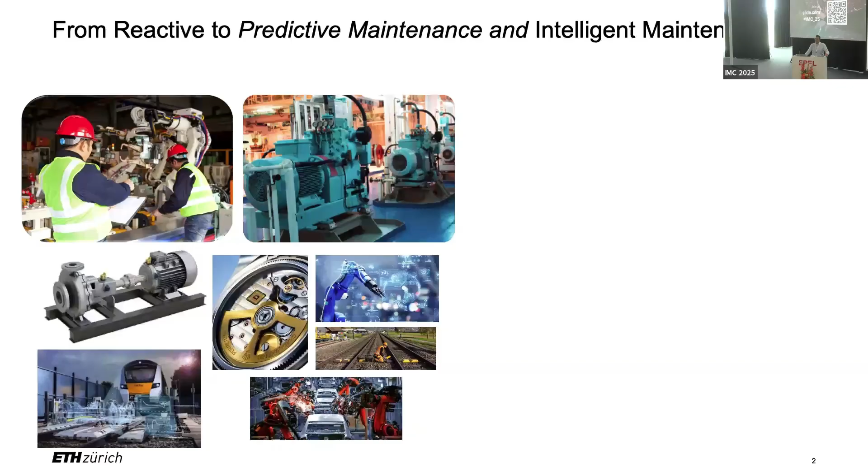So maintenance was always needed on machines, watches, trains, cars. You see from the program we are having today that there are many use cases of maintenance. And we are moving for many reasons, from industrial aspects, marketing aspects, research aspects, with people coming from academia, in a very hot topic.

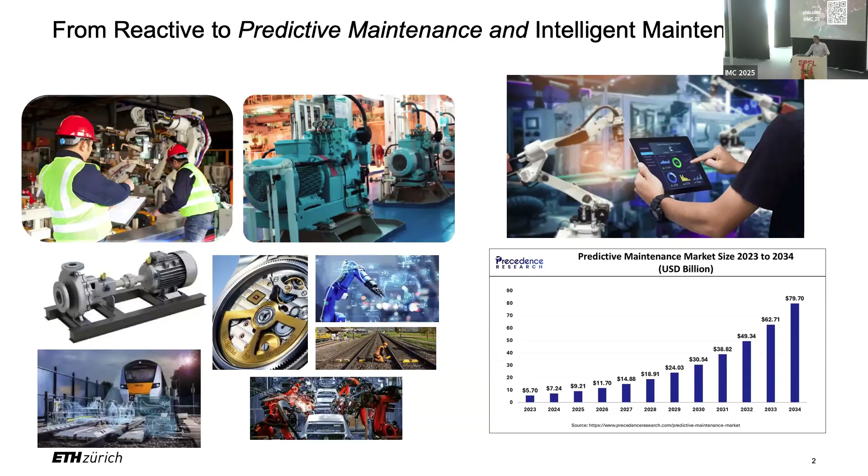We have some robots, devices, electrical motors, whatever needs to be monitored with sensors. The sensors are producing data. These data are collected somehow from the physical devices to the cloud, or in general to some storage. And then the cloud mainly extracts important information from this data. And then we can have a decision. We can go back to the user, or the people that are taking decisions, or we can have automatic decisions. And somehow we are giving a service to the monitored devices.

This is still the case. You will see in my presentation some things completely different, from wearables to robotics, but still we have this loop: devices, sensors, some intelligent software in the cloud or somewhere else, and actions that we want to do to our machinery.

And now, also from the title of my presentation, there is a lot of interest and trends saying that this software I mentioned before is more and more based on artificial intelligence algorithms, which are nothing more than software or signal processing of this data, that are today performed in the cloud. They are moved more and more to the edge. And we are going to show what this means, because I would like to show you what I think is interesting, especially in the case of predictive maintenance and intelligent maintenance.

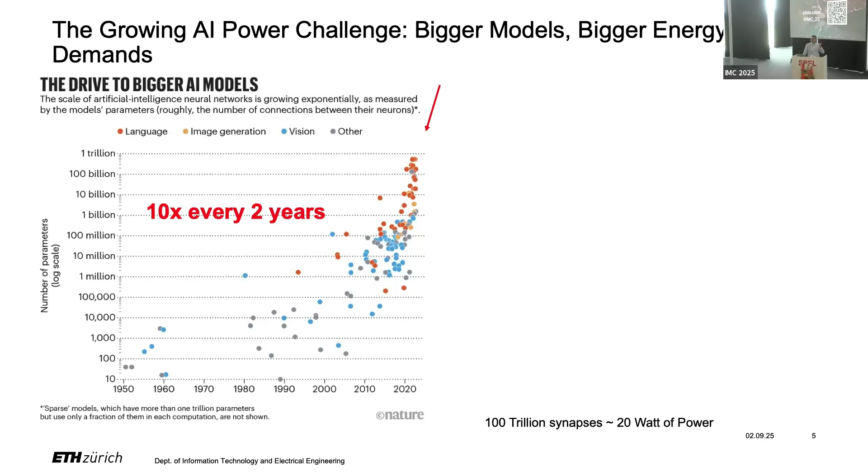So why aren't we bringing this model and pushing it back onto this little core and edge? The main reason is that today these models are quite big and large. So these models are so large that they cannot fit on an embedded processor.

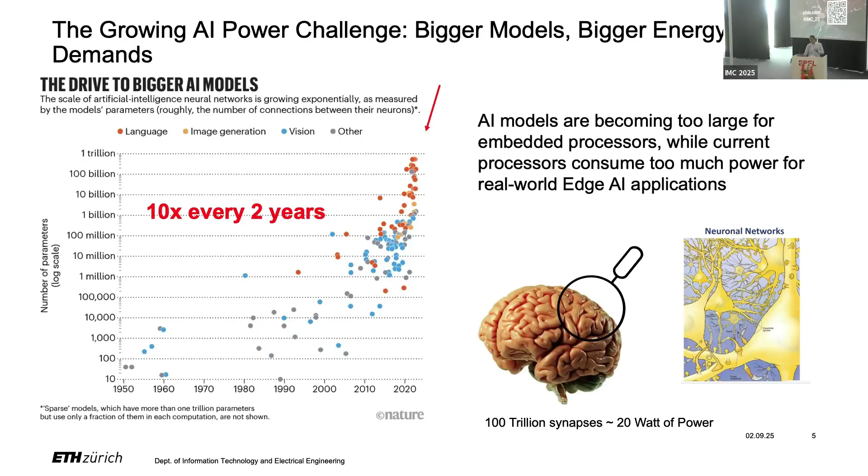We are going to see what this means with the next plot. Even if you are called NVIDIA and you are able to do impressive things in terms of processing power, you are paying for it based on the fact that all the processors are based on silicon transistors.

So you are not special, you are NVIDIA and you are not using different kind of technology. The transistor is the base of all the processors we have, from our PC, our embedded system, our sensor with intelligence cores, and NVIDIA cores, NVIDIA platform.

So why is NVIDIA so good? Because there are many people, but also because they are targeting data center systems. They are targeting processors that can work in the range of hundreds of watts. This is because cloud is very expensive. They are there doing AI.

And that means, of course, there is no magic. If you have a lot of power, you have a lot of memory, you have a lot of computational resources that in parallel can run your data.

So is this enough to run all your models in mind for predictive maintenance? Probably yes. But what is the problem? The problem is that if you want to push at the edge, likely you will have a processor that needs to consume less than a watt, let's say.

You can have also a few watts, but we are in the range of watts versus hundreds of watts that we can spend in the cloud. And as they are using the same technology, the same transistor, it means that you are paying it in terms of memory and computational resources.

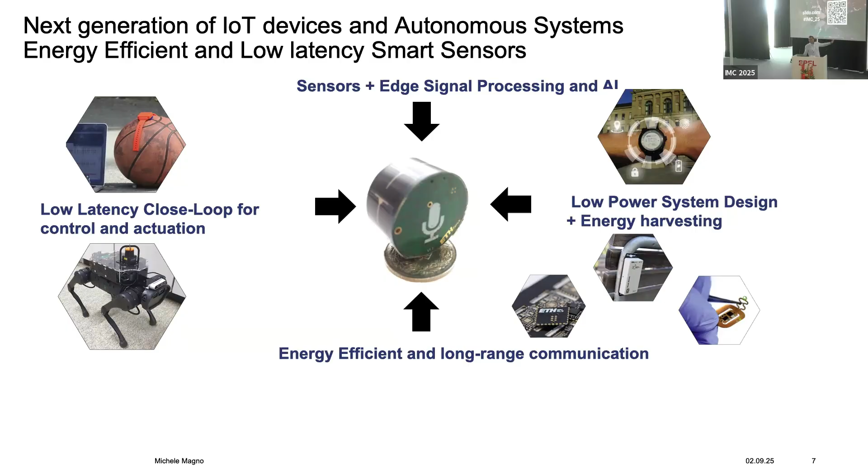Just to give an overview, these are the main 4 topics of my group that we work on, both in teaching and in research, supervising many students and PhD students as well.

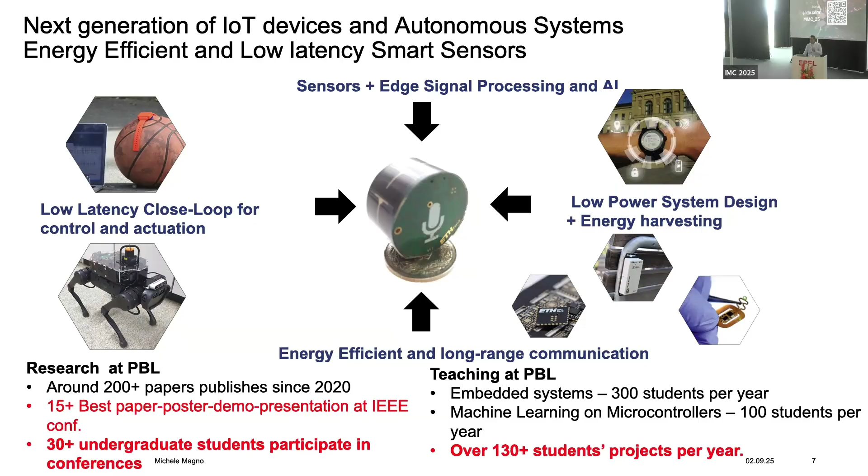But I want to go more concrete, because this is a generic overview for my group, but in reality, what does this mean? It means that since we cannot create new hardware platforms, processors, GPUs, or microcontrollers that consume only a few milliwatts or watts of power, you can instead play on novel sensors. Not always possible, but today there is a lot of interest in designing new sensors. I'll give an example of sensors producing relevant information for a particular application.

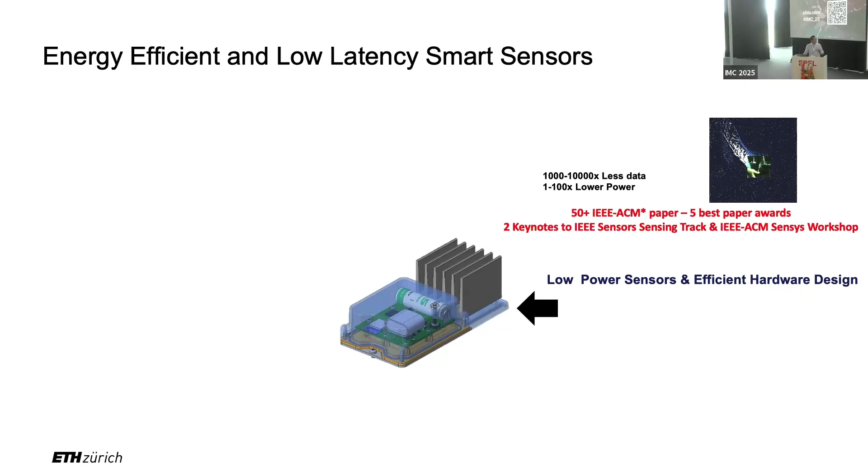So you can reduce it, you can go up 1,000, 10,000 times, less data, and lower latency in processing this data with efficient artificial intelligence to do the same job. For example, in this case it was a navigation system for a robotic platform using an event-based camera. You can do the same job faster, at parity of technology in terms of CPU power, faster and with lower power. We're doing the same job with a different sensor, different artificial intelligence.

So we can push existing hardware and existing solutions, in terms of hardware and software, bringing innovation through combination to a level that is way more than Moore's law can give you, that is, double memory, double computational resources every 2 years. You can go today to things in the range of 1,000 times lower energy, 1,000 times lower latency.

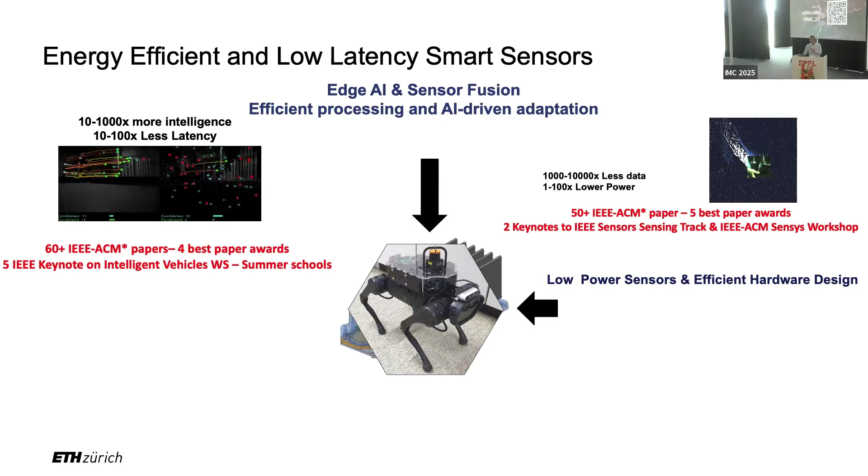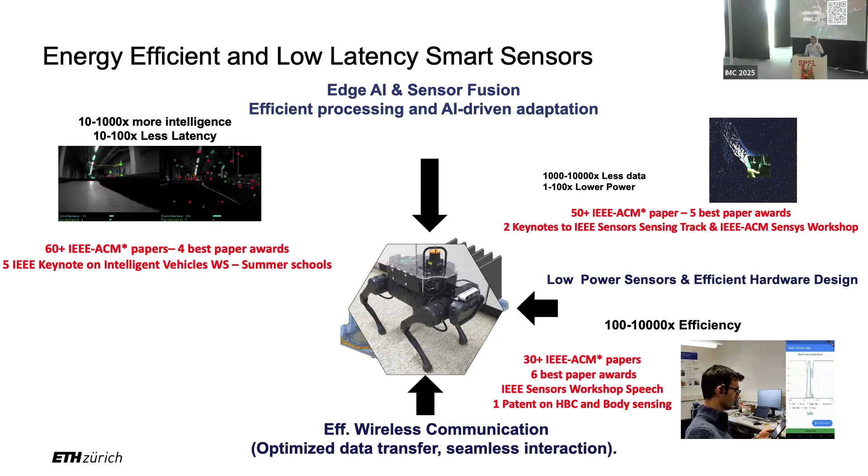And I think here there is a converter problem. As I mentioned in this talk, I'm not going to speak too much about efficiency, but in this case I want to show, for example, this was using radar for gesture recognition instead of camera or other sensors. We could go down in this range of intelligence and latency. We have gesture recognition with a little radar on earbuds, and we transmit only 1 byte, so efficiency only in communication, to the smartphone.

This is the gesture that the user, in this case our PhD student, was performing there. And you will see that this architecture fits very well the application-specific case. Of course, this is only valid if you have your application clear in mind. Is this camera, or any other sensor you'll see in this presentation, better than an RGB camera? It's not true for everything. But if you want to identify an object, a defect, or any other target where movement is very important, yes, this can be a crucial bet.

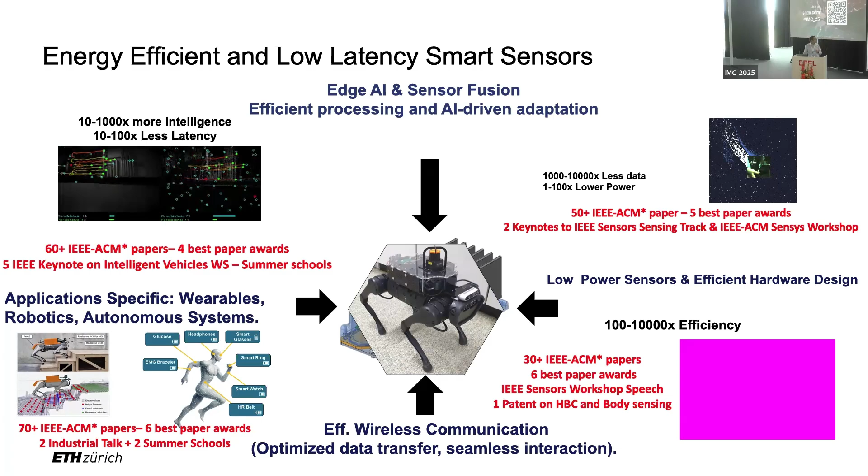And you will see that often it's actually the combination of different sensors that brings the benefit. This is why, in our group, we focus on energy-efficient smart sensors in general. It's good to have the application in mind to be covered, and efficiency at every level, from the sensor, to the low power design, to the AI part, and to the application, eventually also the communication if this is needed. I want to go through some examples of this topic, showing why this can be crucial for many applications.

You can see that, if you look at only this node, this is actually a node that we did in cooperation with a company in Italy, where we were supposed to monitor temperature, humidity, and acceleration of the electrical machine. This is actually quite common; you've probably already seen it, that many people proposed that you can put a little node on your electrical machine, and then it tells you, especially if it's sending information to the cloud via Bluetooth or similar, what is happening in your machine.

And with this we went a bit beyond this vision, to get something that is self-sustained. In this case, we would like to place the sensor on the motor and not touch it anymore. So we want to place it with the right sensor and only alert when something is happening. And to do that, you need to take energy from somewhere. If you don't want a battery, if you want the vision of it working forever, you need to put in a source of energy.

In this case, we found the application very important, what was reliable there. So we have a difference of gradient: the motor that we can rely on is around 55 degrees, and the airflow is 25 degrees. So we could exploit thermal energy harvesting. Why is this important? First, low power design. Second, we can take energy from what is available. So if you tell me we work with vibration here, well, we don't have enough vibration.

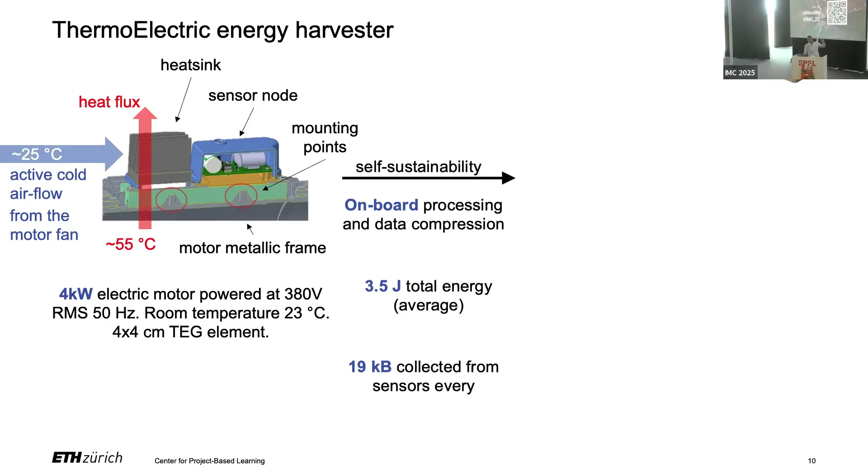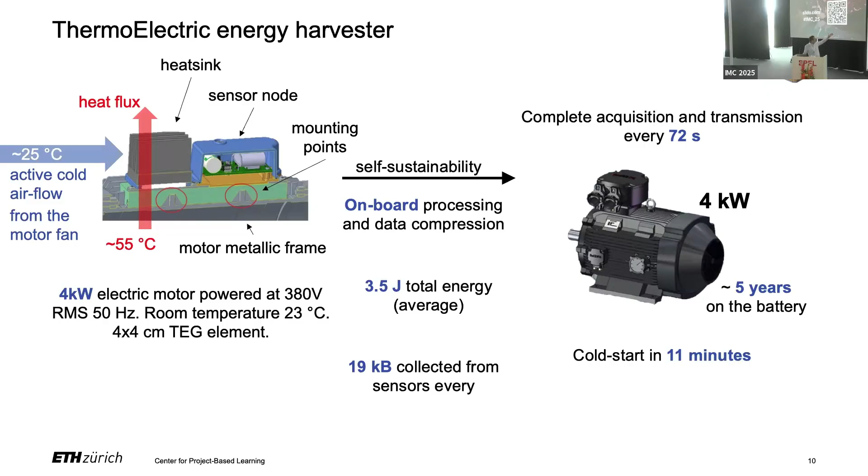And if we combine all together, including the tiny machine learning that is able to perform the prediction of the condition of the machine, we can have in normal condition, with the battery, 5 years of life. In reality, we can have a self-sustaining system that can be placed, like you can see in this case. I think now this probably became a product from the company we are working with, and basically you can monitor your machine in different ways. Of course, this is a completely flexible, custom system, so you can tune it for your specific goal.

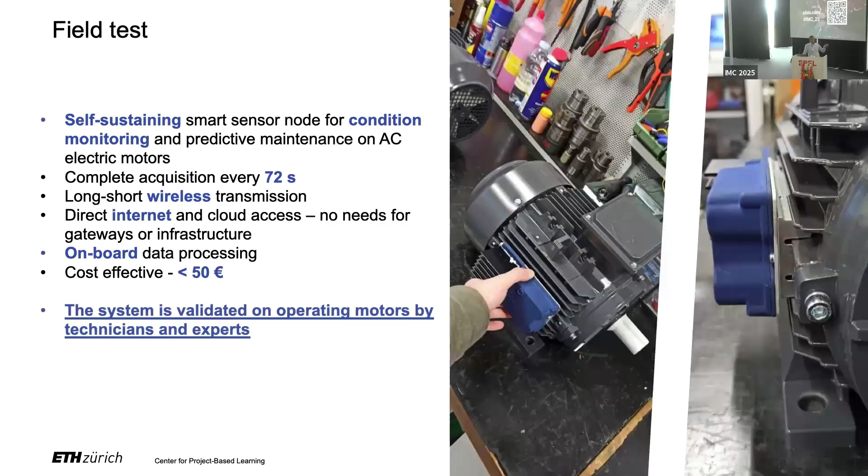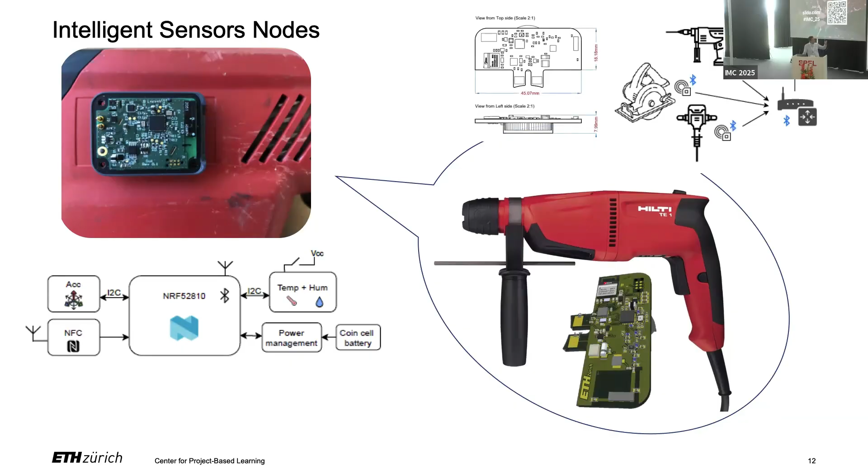And this is also what we did. With the same approach, we were working with different intelligent sensor nodes. They are using something similar: Bluetooth Low Energy, an ARM Cortex M4 core, so a little microcontroller consuming in the range of milliwatts of power. And we could retune it, changing of course the shape, changing the sensors accordingly. So here we see many sensors we are using.

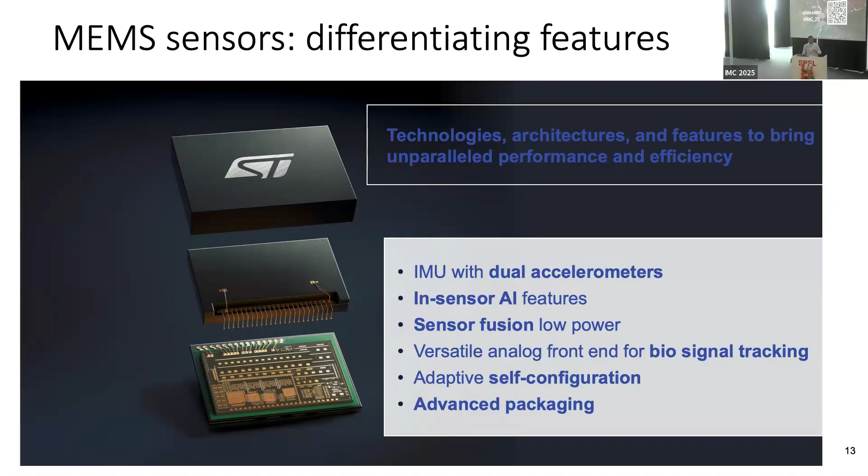Why could this be very interesting? Because it's very interesting for cost reasons, for space reasons, for supply reasons, because it's consuming microwatts of power, and to have an always-on system that can monitor your machines. I think this approach is important because we were using only some kilobytes of memory to perform our AI part. And it's a system that has more or less 16 kilobytes free to do it, so our model can already run on it. Of course, there are trade-offs. And it's not only STMicroelectronics; Analog Devices and Bosch are proposing something similar.

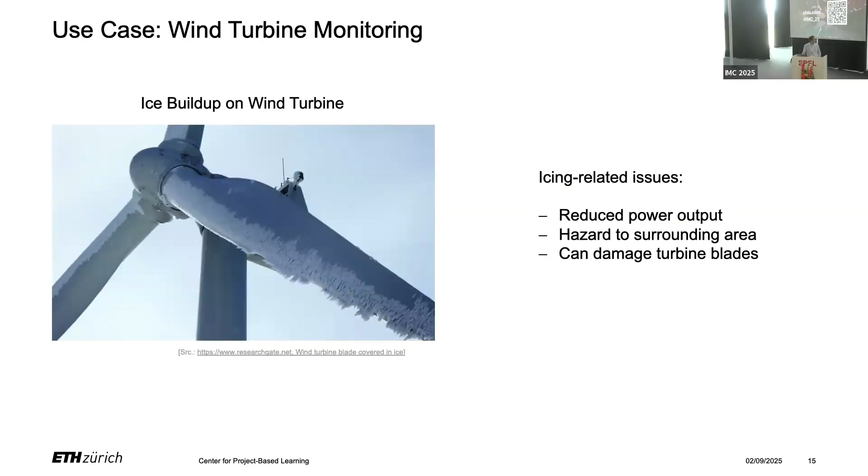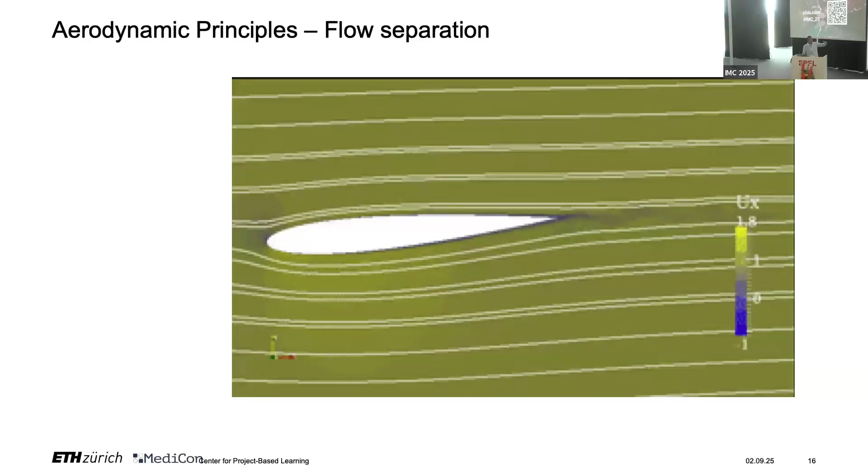And just to continue with the use cases, and then I go to the conclusion, this is an approach that you can use in different ways. These are all projects using our system. In this case, we were doing a project for wind turbine monitoring, where ice is important. Also, the aerodynamics is very important. And we started from scratch. Even the experts didn't know very well what to monitor. So they were using very expensive sensor nodes in the wind tunnel on all the blades to see what can happen. And this also comes from design optimization.

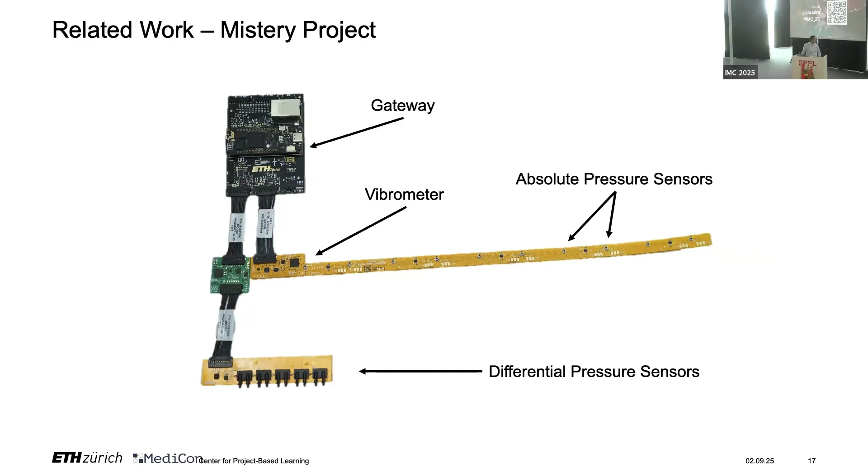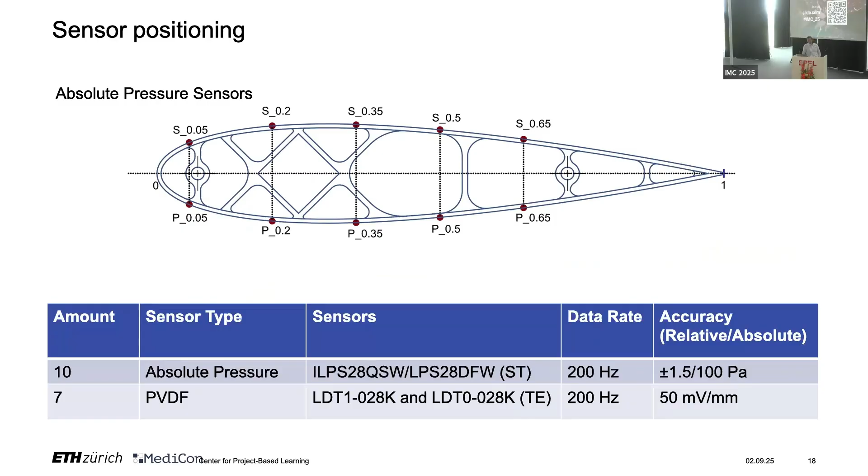So basically we designed the differential pressure sensor monitoring system, pressure sensor, vibration, and we also tried other sensors not displayed here. And we checked what is the best solution and the best position of the system to make this combination of sensor acquisition and AI give the best detection for both ice monitoring and the flow. And this is a startup that came out of this research project that is now trying to get more in-field demonstration, but all the hardware, software, firmware and the main machine learning part was done by us.

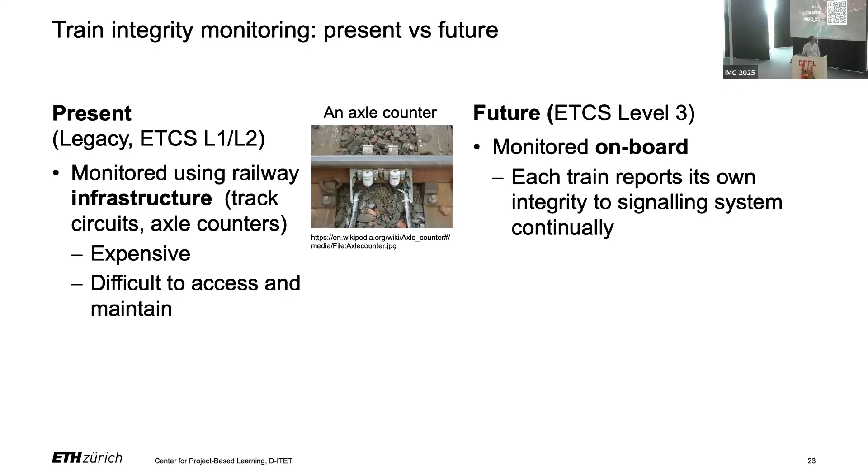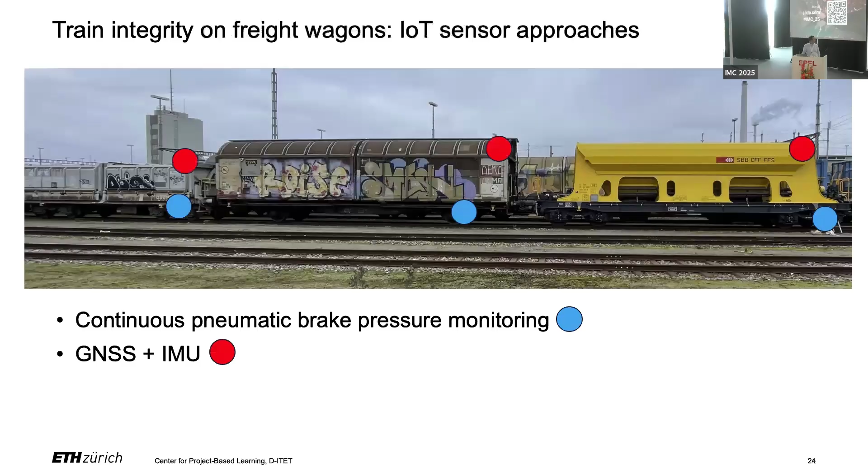I'm going a bit fast here because I want to go to the robotics part. We also did some cooperation with SBB, where we wanted to investigate how we can have IoT nodes, ultra low power and self-sustaining or battery operated, to monitor the integrity of the train, especially for the cargo that today is not supplied with sensors. And with the same approach, we ended up with ultra wideband technology, which you will see better in the video.

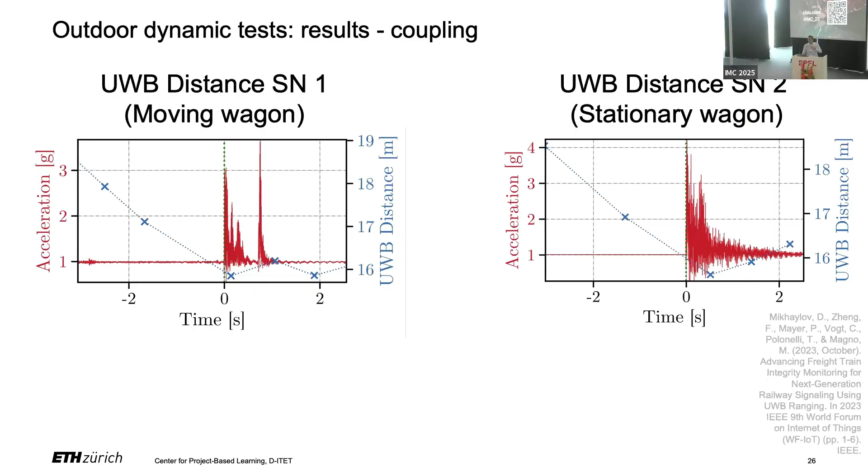So you can have two different nodes, and these nodes are coordinating with each other. You can see the blue line there: when the train is coming closer, closer, closer, you can monitor in real time what is happening and the distance to the next cargo. And then basically you can use this information to see if your integrity is still there.

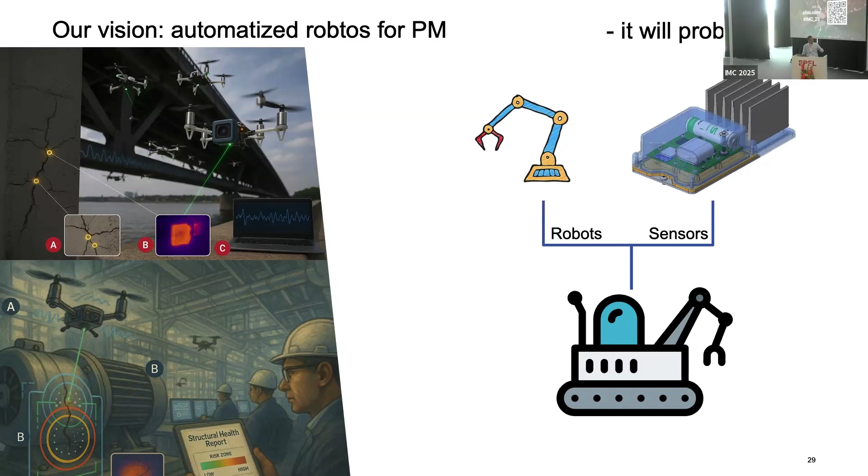And I want to, again, close the loop with the robots, because today this is a big reality. I don't know if you heard the introduction talks or the many talks NVIDIA people give. They are not pushing anymore on doing a new platform. Of course, they're doing new platforms, but their goal is not having people doing AI models. Their goal is doing physical AI, so bringing AI into the physical world. So it's an embedded system. And why? Because they have even more consumers. It's not only people on the PC sending their text, but they can bring intelligence where it's needed, in the field.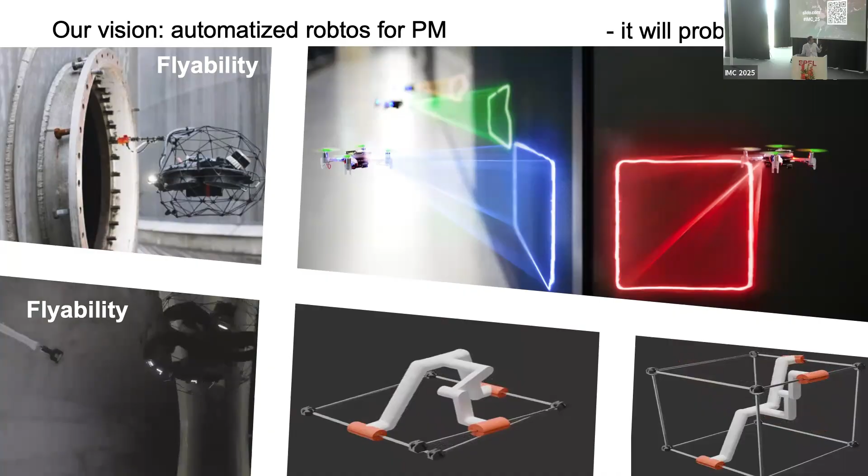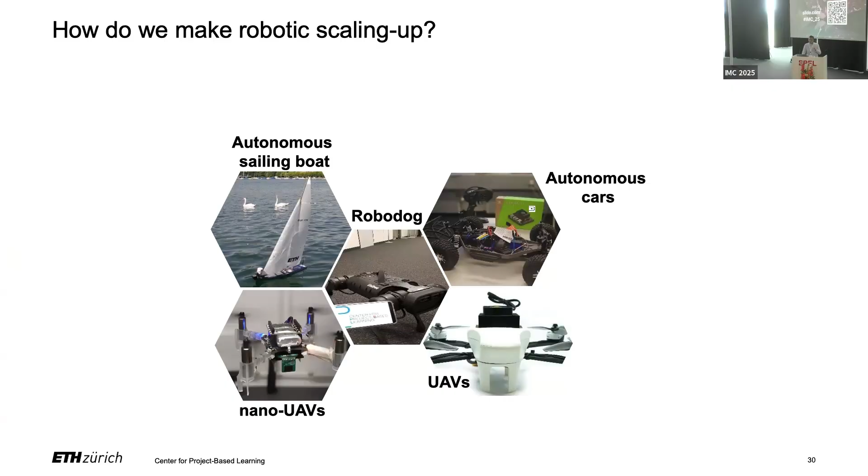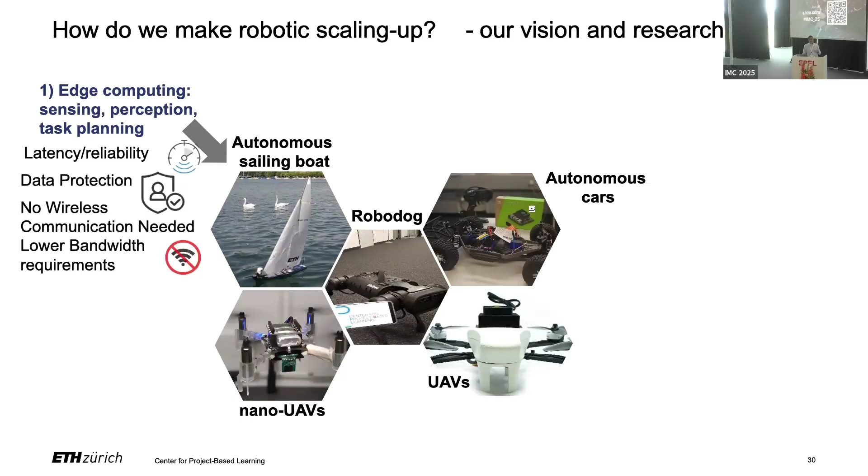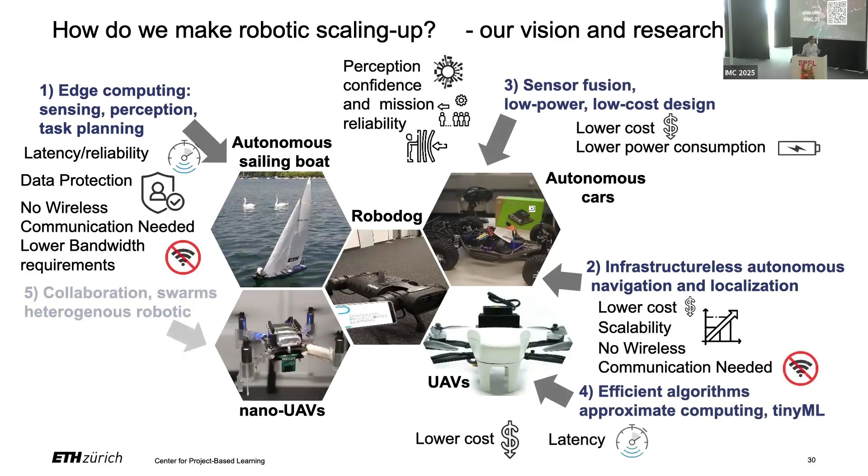And in particular, for intelligent maintenance or predictive maintenance, the approach is very similar. I'm coming from wireless sensor networks, we are moving now to robotics, but we are the same people, because the important fields there are the same. Edge computing: we want to bring AI to a small embedded platform. Also, the embedded platform of NVIDIA is consuming 10 watts, not millions of watts. You need to combine it with a system that can work without a wireless connection. You have sensor fusion algorithms, efficient algorithms that need to run on this platform, and it can also lead to cooperation.

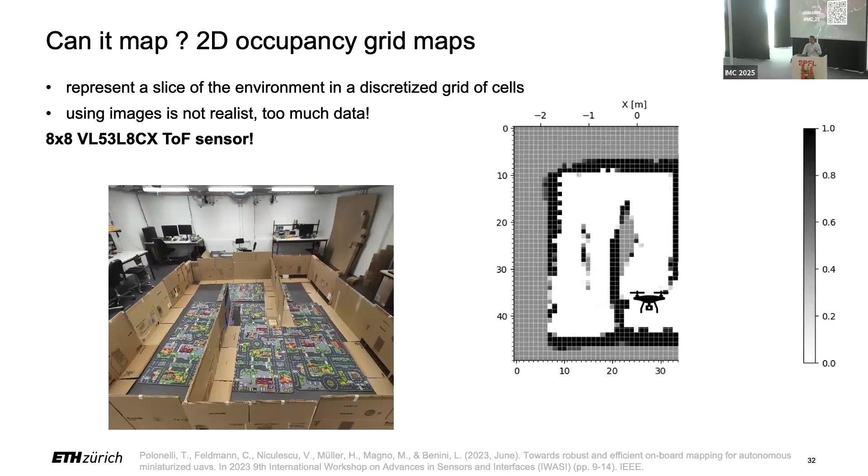And I want to close with two little examples. We did a lot of investigation on different sensors, radar, and we use this little robotic platform to show that you can replace the LiDAR, which today is used for autonomous driving and many autonomous systems. A LiDAR is expensive, 3,000 euro, and you need a big platform to process the information. You can work with these 3 sensors that cost $1, $1, $1 to have a SLAM system. I will show it with a video.

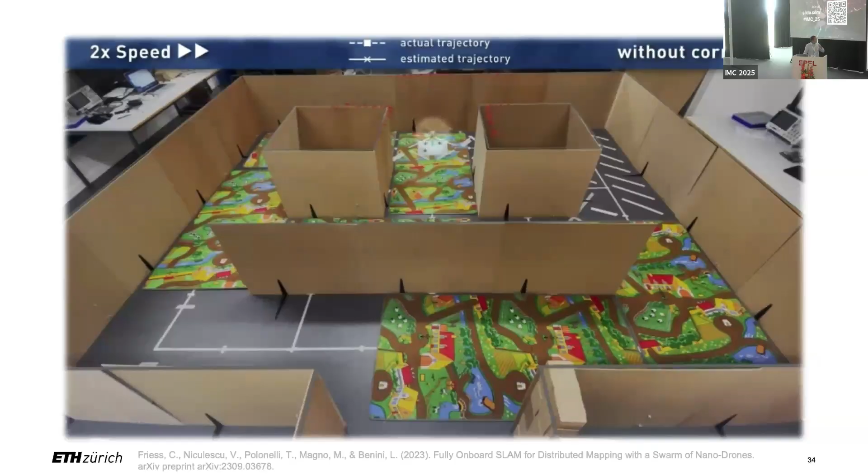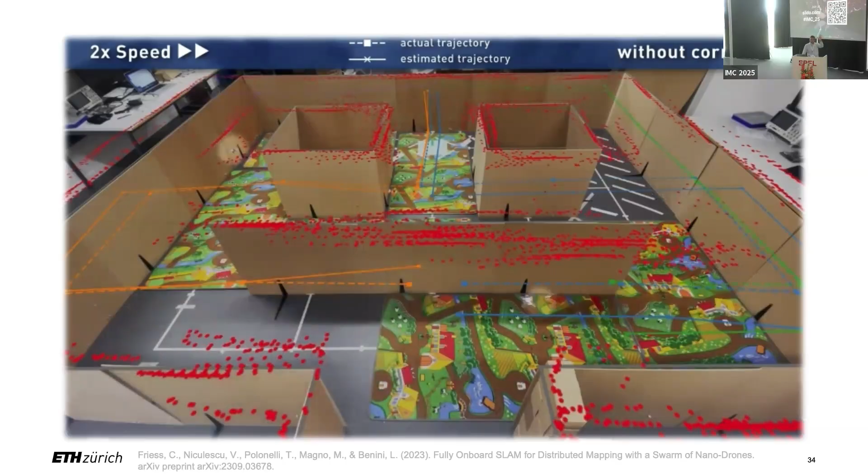This is a small drone. We use a small drone for a single reason: we want to test in a challenging scenario. There is a combination of little time-of-flight sensors from STMicroelectronics, radars, and ultra-wideband to coordinate them. You can have 4 little drones that are able to make a SLAM map of an unknown system. There is no connection with the cloud, no connection to anything. There are only the 4 drones coordinating themselves, and this system can run on a microcontroller that consumes 10 milliwatts of power. No GPU, no NVIDIA.

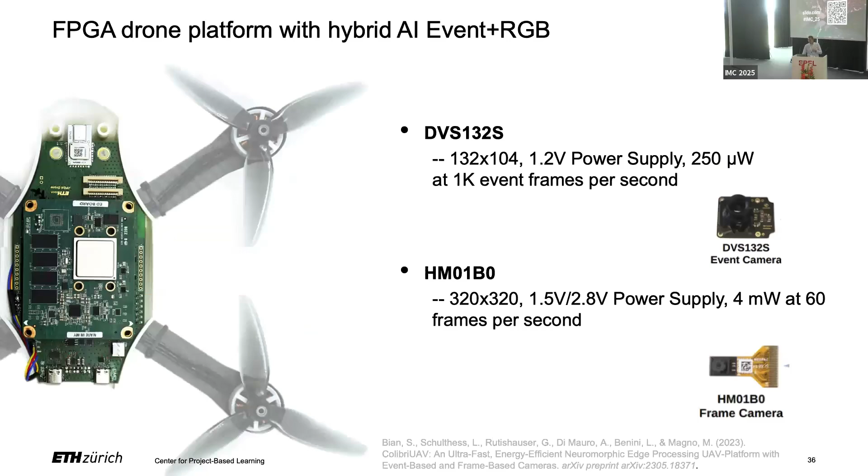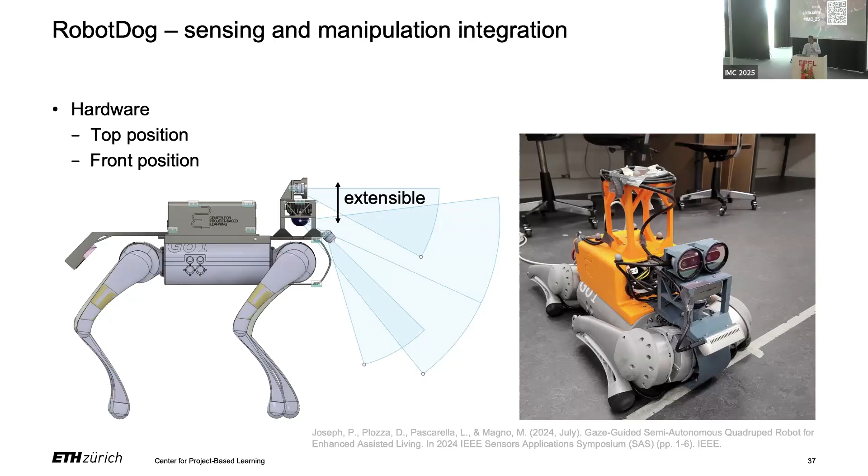Of course, we work also with bigger things, and here I don't have time to go into all of them. These are samples of the event-based camera, and we try to build our own hardware-software system. We are electrical engineers by nature, so we work with hardware and software. The robots we buy like a toy, but we build our own system with a novel sensor and a novel architecture in terms of the performance platform. In this case, we are mainly using GPUs from NVIDIA. We were investigating, and still are, in a European project, crack detection with the depth camera and event-based camera.

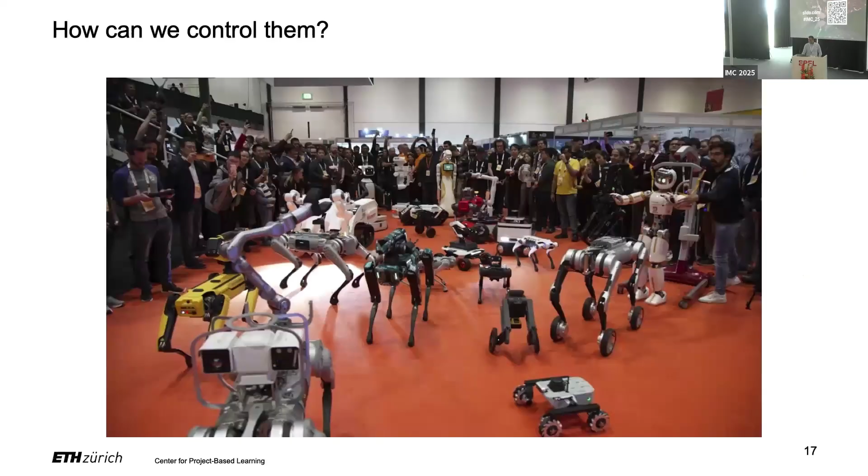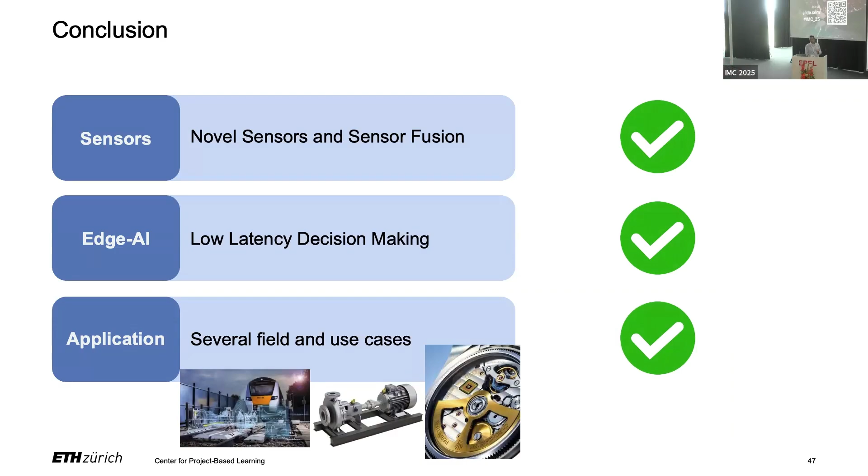And I think my time is closed. These are more or less samples of what we are doing with robots, and also in terms of combination between wearable devices and robotic platforms. What I want to show is that I strongly believe that with novel sensor fusion, and the combination of sensors, AI, and application, we can cover a new branch of applications. I can close with a video to show that these things are really working, combining different monitoring systems that are mobile and small, like the small drone.